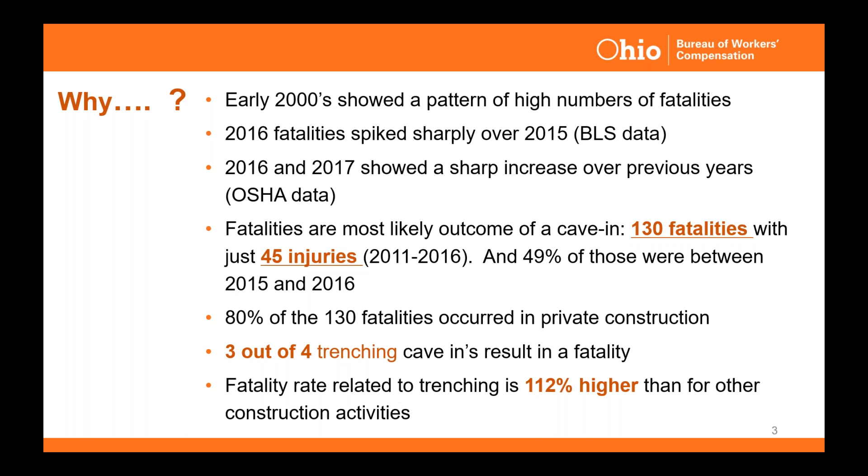There's some annual background information on excavation and trenching cave-in data. You can see that spike I referenced in '16, '17, '18. In 2015, this is from the BLS - from January 1st to December 31st of every one of those years. Certainly cause for alarm. Obviously one fatality is too many, but to be seeing about 25 a year, that gets our hackles up in the safety profession.

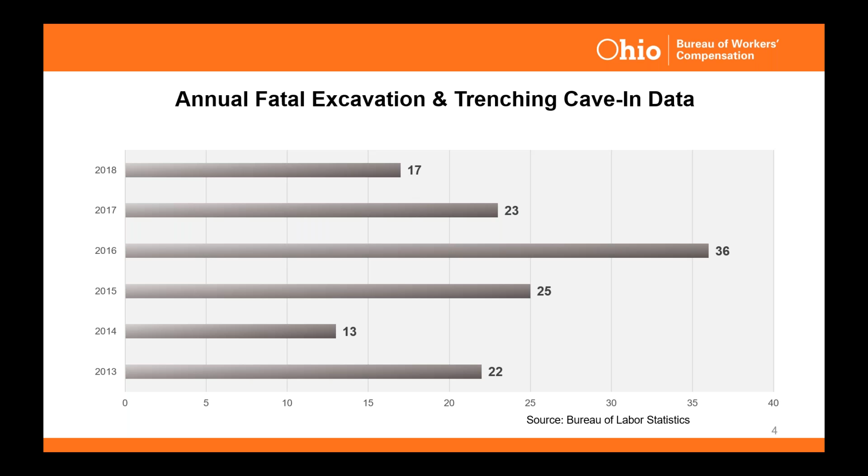OSHA has a little bit different fiscal year, so these numbers don't match up exactly, but you can see they're 20, 25, somewhere around that number every year, which is great cause for concern on our end.

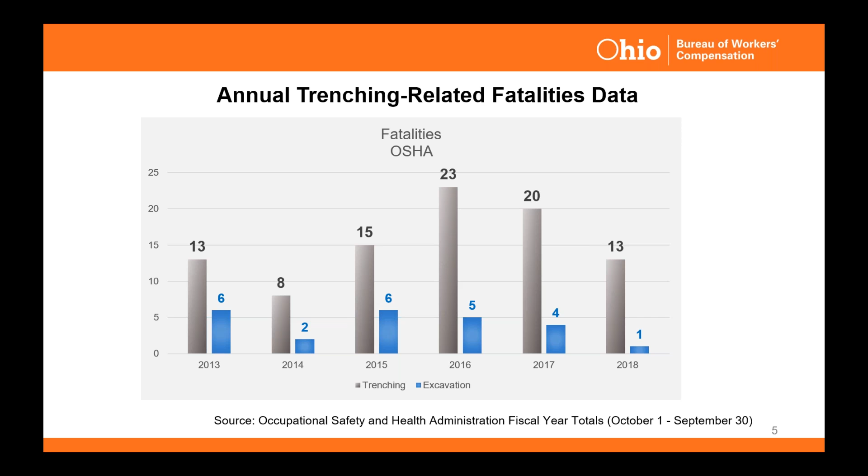There was also a spike in the early 2000s, and that was a really alarming case because one year we had - I believe it was 2002 - 45 trenching fatalities. So a very big problem. OSHA launched a study related to trenching fatalities, and that study was released in 2003. Interestingly, all the statistics from that study are still quite relevant today, so we still use them.

There haven't been a lot of studies done since specifically on this topic, in terms of the demographics gathered during this study. But what OSHA found was that the #1 cause of fatalities was unprotected trenches - totally preventable again. The soil type had not been identified 65% of the time, which is a prerequisite to trench entry. The competent person was not on site 86% of the time - they are there to monitor changing conditions, so it sounds like things may have changed in some of those.

Producing was more important than safety 88% of the time. So it was deemed that the people jumping down in the trenches were - we won't say not as important - but I believe there's a lot of denial that goes on, so producing was prioritized in those cases.

65% of the employers involved in the study had provided no trench safety training. We're finding that to be quite prevalent today - we're trying to rectify that. 42% of the employers had less than 10 employees, so we're talking about small companies. And 5 or fewer workers were on the site when the fatality occurred, so again we're talking about small construction companies, small sites.

When we're out in the field, we don't see the very large companies do this - you know, the Danis people, Great Lakes Construction - the big companies are not really as guilty at cutting corners as the small ones. And the majority occurs in residential construction, you know, using housing developments.

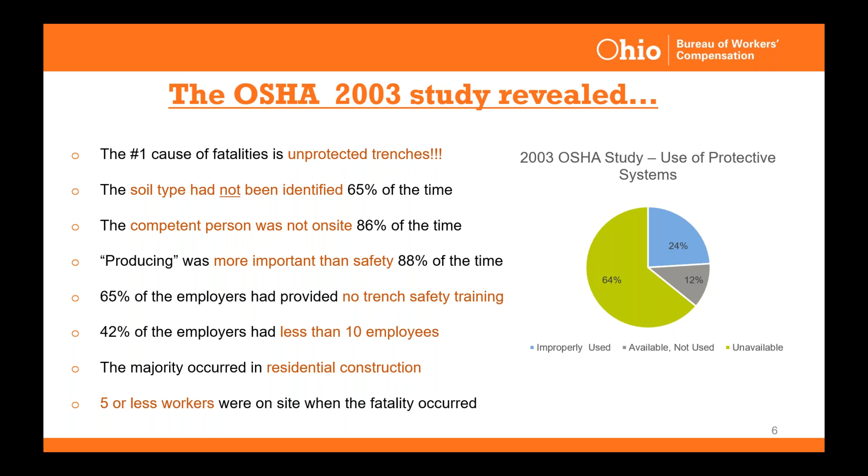When OSHA found all of these things occurring, and some alarming deficiencies in trench safety practices by employers, they launched a National Emphasis Program. It was formulated back in '17, went into place October 2018, and it's still going—OSHA will continue to emphasize trench inspections and trench safety. That order will remain in place until it's canceled or replaced by another order. OSHA also has a really good resource page if you're looking for ways to implement safe trenching practices—we're going to get into some ways today in the webinar—but they have a really good page on it, and that's linked up there.

You can just Google OSHA trenching safety. It's going to give you the same thing.

So let's look at what OSHA is doing from a compliance perspective. In 2019, just looking at some of the citations involved with trenching citations related to not just fatalities, but cave-ins as well.

One in January last year, 212,000. One in November, 210,000. March, 208,000. February, 143,000. You can see it's very easy, once violations are stacked, to get up to a five to six figure situation. I do want to point out these fines were not tallied as a result of the fatality investigation in many cases—I also pulled stuff simply from the National Emphasis Program where compliance officers were in the field and just stopped by a site. So they are heavily enforcing trenching safety, not just as an investigation following a fatality, but doing drop-bys as part of that National Emphasis Program.

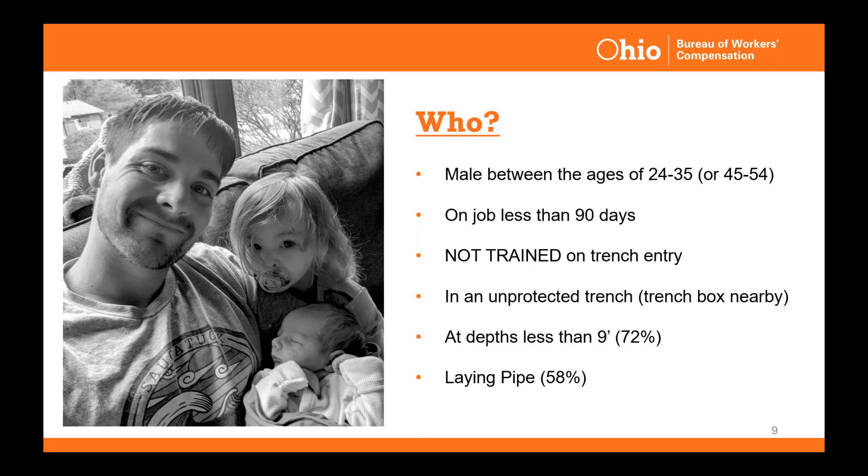So ask yourself, if you lay pipe, is this you? Are you between 24 and 35? Are you new on the job? Do you get in there in an unprotected trench, and are you normally laying pipe? Because 58% of the time, that's what was going on when a fatality or a cave-in occurred.

Some pretty ugly outcomes of injuries can occur as a result of a trench cave-in, outside of a fatality. Suffocation is sort of self-explanatory—it's related to grain engulfment, where every time you exhale, your lungs retreat a little, and then the soil moves in and doesn't let you expand your breathing again, so you suffocate slowly.

Rhabdomyolysis is an intracellular imbalance where the electrolytes in the myoglobin build up and your blood gets toxic, that's a layman's term. Then the kidneys can't process the blood, it's so toxic. They also often suffer concussive forces from the dirt and earth falling in. So we know of people who survive the trench cave-in only to lose their kidneys later and end up on dialysis for a lifelong situation unless they can get a donor.

Amputations—the muscles get starved of blood because the capillaries and veins being crushed, and then a lot of times there's amputations down the road because of gangrene. Traditionally you've seen it, if you ever see an old Western movie somebody always has gangrene set in. So it still occurs today, just because the muscle gets starved of all the blood supply and oxygen.

A lot of back, neck, and leg injuries. There's compression, torquing, twisting, crushing forces involved. Ligaments get torn, tendons and muscles get torn. It's like being hit with a car. So you are going to see a lot of serious injuries, even if you're lucky enough to survive the trench cave-in.

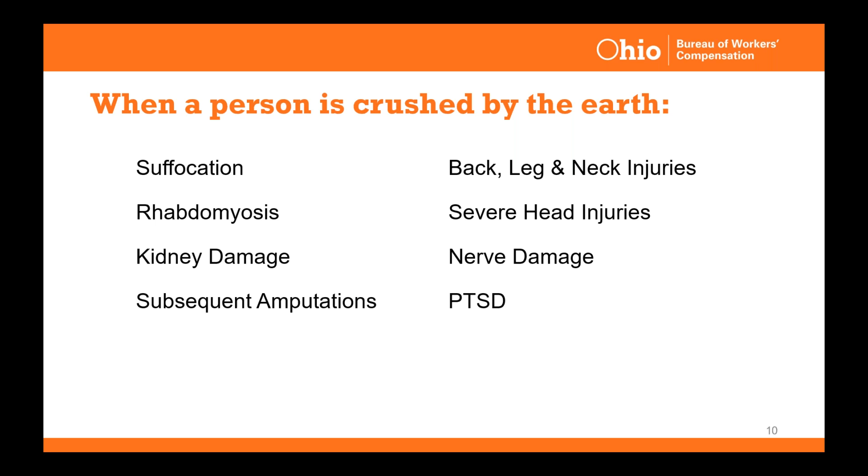So what else can happen? There's other people, as you well know if you've been in the field any time, who have the ability to say how you do your job when you're out in the field—regulatory agencies and those sorts of things.

So in 2020, the OSHA fines for this year, which are adjusted annually for inflation, were $13,494 for the lower end fine. And for a willful violation and a failure to correct, it can go up to $134,937.

Criminal penalties—those are going to be on the increase. They're now charging felonies, including manslaughter. In 2015 there was a change between fatality cases being tried in local small courts, where the magistrates and judges may not have known about OSHA laws, and the citations and fines involved were so small that it was not often moved to a higher court. But in 2015, under the Obama administration, there was a change made where OSHA, the Occupational Safety and Health Administration, is now partnering with the Federal Department of Justice, the DOJ, and they're being tried that way as felonies.

So we're seeing a huge increase. I believe between 1988 and 2001 there were about 150 referred over, and I believe 90 were prosecuted, but only 8 of those between '88 and 2001—that was the only study I could find—resulted in indictments. But already since 2015, since it went to the DOJ and it has more teeth, we've seen, I believe, 6 in the United States where indictment occurs. So usually we're seeing manslaughter charges and jail sentences, usually up to 6 months as a jail sentence, and the fines by the courts can go up into the 6 figures once again.

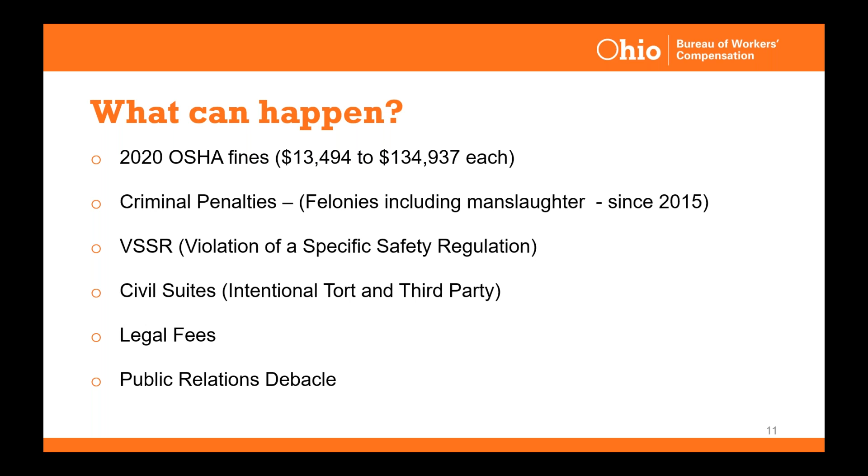So what else can happen? At a multi-employer work site, OSHA can cite anyone on site who's exposed to the hazard. So if you have a general contractor, maybe an electrician and a plumber, maybe some roofers coming out to check out the work site, everyone who's near that trench can be cited, not just the person working on the trench, not just that contractor. The chain reaction is that—and we've seen it rarely, but it does happen—much like a confined space, where one person goes into a trench, maybe partially or fully buried, and the co-workers, being very passionate about their friend, jump in to help, and then there's a second collapse, which is quite likely after the first collapse of a wall, and then you have more than one person affected.

Rescue squads can also fall victim to this, so they have to take a lot of time to set up for a trench rescue. Normally by the time they get there, 10 minutes have passed, and at 10 minutes anyone who is completely engulfed by the cave-in will have expired by that time. There will be escalated workers' comp premiums as well.

Hey Mona, you've been talking now about 20 minutes. I think we should break it up a bit and let's get some interaction going on here. Why don't... that's funny you said that.

Thank you, Ray, because I have on my next slide a note, and I wanted to say what an excavation is: a man-made cut, cavity, trench, or depression. So keep that in mind, everyone. But then what's a trench?

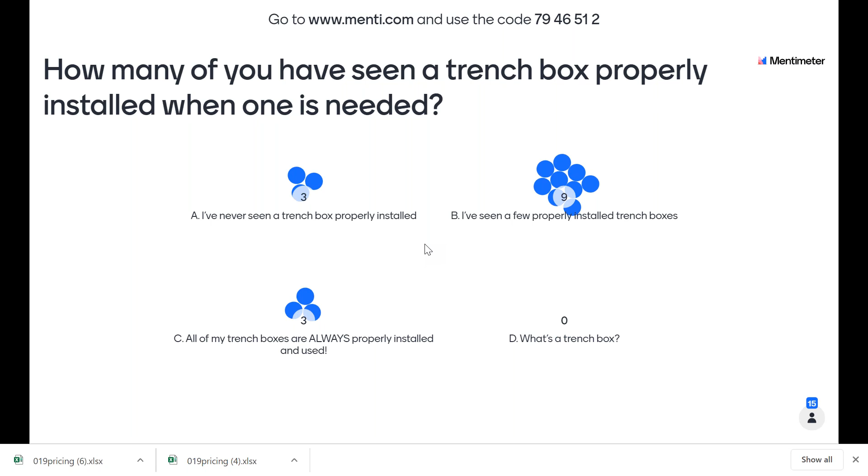All right, come on people, I want everybody to participate. We only got like 15 dots. We have a shy crowd today. Don't be shy, people. Or their carbs ran out from lunch and they are slumped in their chair. Come on, we're not even halfway there yet, let's get a few more people in here.

How many people do we have logged on, Ray? I thought it was somewhere around 45. Am I right? I haven't looked at it lately. Right now we've got 61. Oh okay, all right, only 23 people have answered.

All right, you probably can't see the screen, can you Mona? I can on my second screen. I'm actually seeing a lot of blue dots, and we need more blue dots.

Okay, all right, 28 people have answered. The majority is B, I've seen a few properly installed trench boxes. 3 people have never seen a trench box properly installed, 1 says what's a trench box, and 3 say all of my trench boxes are always properly installed and used. So the majority is B, a few have seen a few properly installed trench boxes. And which is in keeping with statistics. Yep, unfortunately.

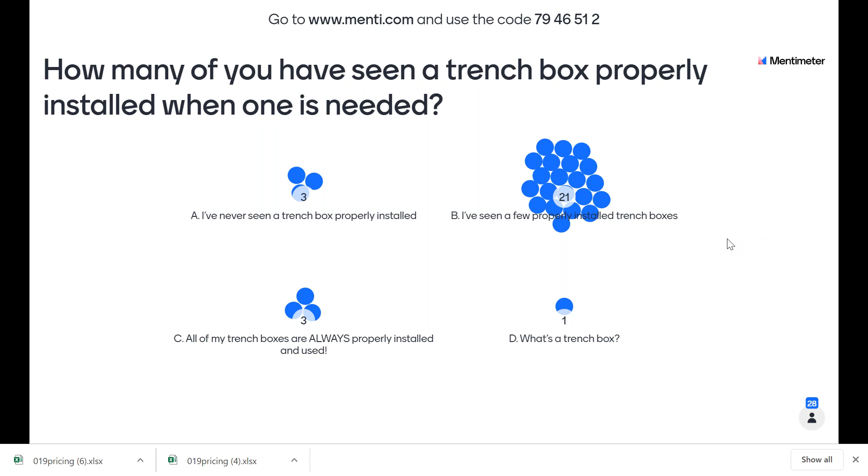See, we have a comment, let me see what this is. Okay, we have a comment there to answer your first question, Mona. Yeah, when we get back to the PowerPoints, okay. I've copied several comments into the chat box for review.

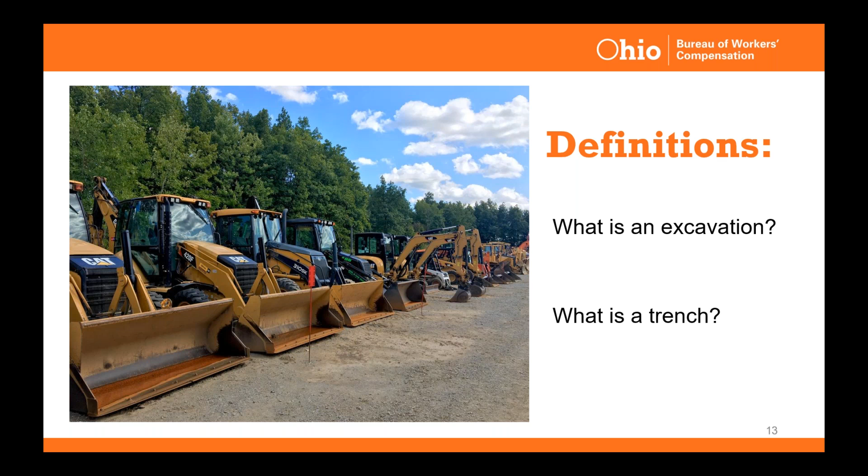And for some reason, when you're switching, give us a second, bear with us, because when I'm getting switched back as a speaker, there's a delay in my slide transition. So I have hit the button for the next slide. I'm going to start talking anyway while it waits for itself to change. There it goes, there you go.

So yeah, there's a ton of related rules and regulations. Those are on our trench safety page for the state of Ohio. We're going to give you that website here in a bit. I believe it's trenchsafetyohio.gov, but the point being that there are a ton. And on our website, you can go and click on them.

I've actually got this list copied on the Ohio Bureau of Workers' Comp, trenchsafetyohio.gov website. And you can see that we don't stop short at just OSHA rules and regulations. Ohio Revised Code also has some. And then there's that -- we'll talk later about traffic -- and then ANSI has some, and we're going to talk a little bit about ANSI today. I think it's pretty important.

The common ones we just look to is going to be subpart P, 650, 651, and 652, ANSI, and then the Ohio Administrative Code.

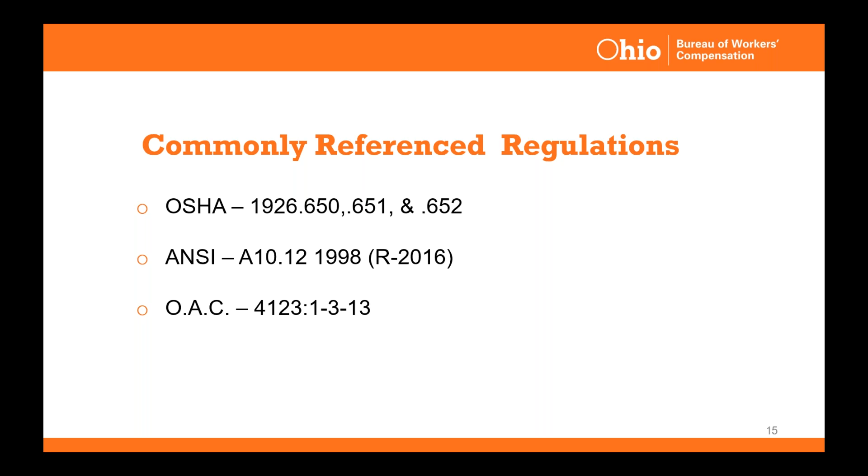So not a lot more is expected of you as contractors. It hasn't changed that much. It's just very important that you look at what is required and follow through with that. We did talk about a competent person earlier. So for the rest of today, just to give you a little outline: we're going to talk about the competent person discussion, excavation hazards, protection from cave-ins, and additional excavation hazards to look for. We also want to talk about safety culture, because the biggest reason requirements aren't followed in the field is the overall culture and attitude on the work site, so we'll give you some ideas on how to do things better in terms of practices and on-site implementation.

So what's a competent person do? Well, this is OSHA's definition. I told you we would discuss ANSI, the American National Standards Institute, but OSHA's definition of a competent person is that they have to be capable of identifying hazards and having the authority to eliminate them. That's key. The competent person role itself is a very technical job.

Anyone on the site is going to look very heavily to that person. They have to be technically proficient. It's going to be someone you can ask questions to. Finding someone who can do the technical part is perhaps not quite so pressing, there's a lot of people on the job that can normally do that. But the question is, that's the easy part, to be honest, picking someone you can train to do the technical part of the job.

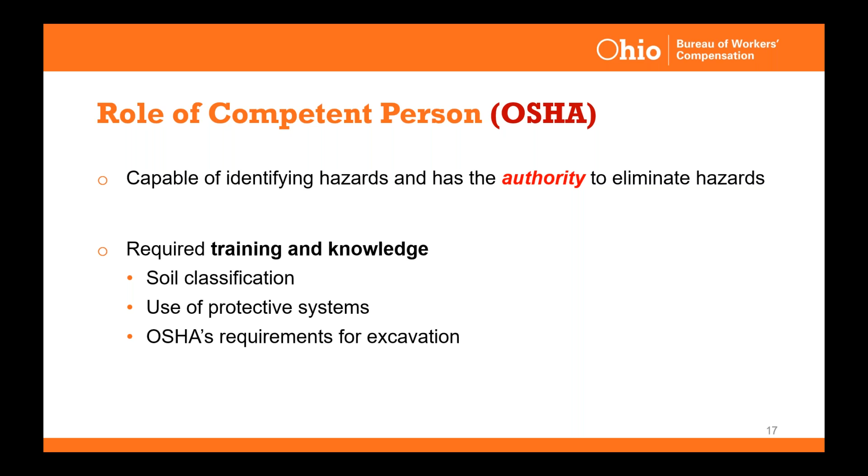ANSI, the American National Standards Institute — this is a little above and beyond what OSHA says, because remember OSHA said they need to be capable of identifying hazards, having the authority to eliminate them, and knowing the basic OSHA standards. ANSI says the competent person for excavation should be one who's received training, can demonstrate the knowledge, skills, and abilities required by the standard, capable of identifying all existing and predictable hazards in the surrounding and working conditions that are unsanitary, hazardous, or dangerous to employees. And that has to be a person who has the authorization and responsibility to take prompt corrective measures to eliminate and control the hazards and conditions.

So it is a lot more in-depth. Ray and I give each other points for how many word plays we can make on this — in-depth and digging in deeper. But the standards are there, they can always be referenced. There's YouTube videos available to train and refresh people, so that's always an option for you.

But remember, as far as OSHA is concerned, you might ask, what's the relationship between OSHA and ANSI? Well, OSHA can incorporate ANSI standards in two ways. They can reference the ANSI standard within their OSHA regulations, referred to as incorporation by reference to another standard, which they're allowed to do. And they can also require adherence to ANSI standards through the general duty clause. Unfortunately, the general duty clause is often seen following a post-investigation situation from a fatality — they don't usually just show up on site and throw out a general duty clause, because they have to be able to reference a standard. But it will often happen as a follow-up, unfortunately, to a fatality.

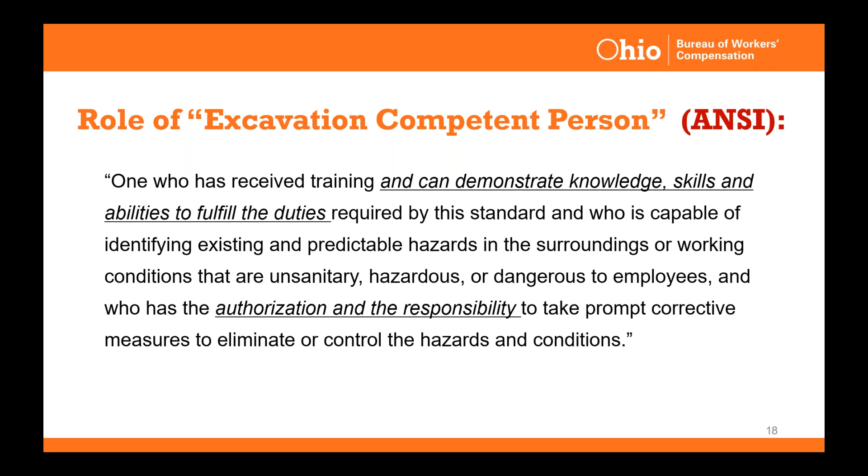Remember that OSHA can incorporate ANSI standards even in the process of a citation. So ANSI does require that a written safety and health plan be developed by the contractor for excavation work that describes the requirements of and the procedures to be implemented. That's for everyone, under their general requirements. Again, OSHA can reference those, litigators can reference those. If you were to have a fatality and it were to go into the form of a civil suit, think about what you're going to be asked in court.

How do you defend it? Can you defend it to the attorneys, the judges, to OSHA? Did you have a written safety and health plan for the entry of that trench? Not every trench, that trench. You should have specific procedures for that one because they're all different. Similar maybe in the same housing development, yet still different. We can talk about in a few minutes why that is.

So general requirements from ANSI, real quick there - things every employer should be doing anyway. Designate an excavation competent person. Instruct each employee in the recognition and avoidance of unsafe conditions and the applicable regulations pertaining to the same thing. Prepare a record that contains the identity of each employee, the date of the training, and the means used to verify the employee understood the training. So that is a verification of knowledge.

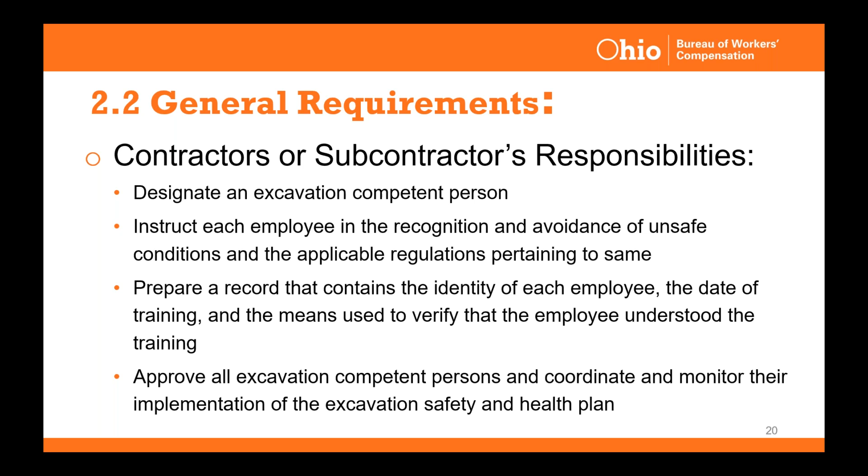The manufacturers of the protective equipment designed these systems for each soil type. So not every trench box is good for every soil type. And then they also design them for the intended depth of the use and whether or not they'll be stacked. Making a mistake in your soil typing can be a very grave error with serious injuries or fatalities that result from that mistake.

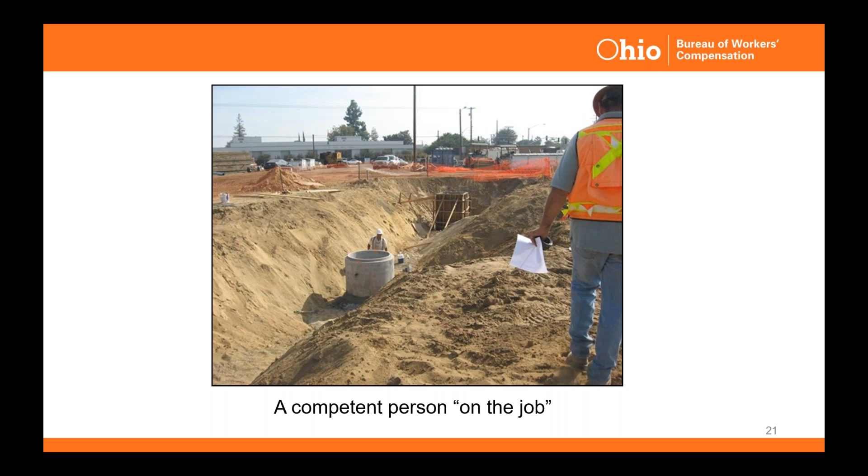Soil classifications. There's a lot in here. It's very technical. Again, it's something your competent person is going to be heavily involved in. But it's easy to remember that there's 3 types. Hint, hint, you might be seeing that question again. There's 3 types, and they're going to fall into 2 categories. There's going to be a cohesive soil and a granular soil.

And again, this is not a course in soil typing. You can go to courses for that, but we just want you to remember that you want to be a little bit familiar with each type. You want to know what you're working on. You want to know if it's being managed correctly. Things to think about.

So there's cohesive and there's granular, and it's sort of the way it sounds. Cohesive contains fine particles that are enough so that they have enough clay so that they'll stick to themselves. Think about them being almost glue-like, but not quite. And think about the more cohesive the soil and the more clay it has in it, the less likely that you're going to have a cave-in.

Granular soils are made up of coarse particles such as sand or gravel. This type of soil will not stick to itself. The less cohesive it is, the greater measures are needed to prevent cave-ins, or some type of protection if you're going to enter that trench.

So type A soil has a compressive strength of 1.5 TSF. Does anybody know what TSF is? Put that in the chat. You can Google that and put that in the chat if you don't know.

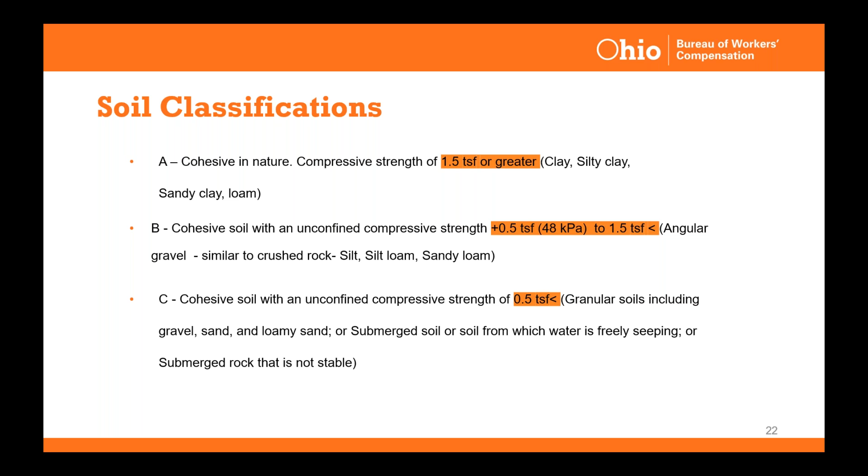There we go. So we wanted to talk a little bit about cave-ins today. Well, let me back up before I move forward. So to make the point of correct soil classification, it's easy to make mistakes. There's a lot of training required. I think it takes practice.

I would do some on-the-job apprenticing type work to try to get that correct and know you're doing it correct. The 2 tests will help you. There's even labs or lab tests you can do, but you want to have it right on site in front of you.

And the one thing, just to mention about correctly classifying the soil, anytime you're not sure, you can always default to C. That means you have to use some form of protection or bracing or shoring.

What's interesting is when I've been in the field, I've had a lot of employers, I think they get a little intimidated. We're consultants, we're not compliance, but we do pull up with state plates on. And I think a lot of people get intimidated by that and get worried. Their default is to say, well, it's type A, we don't need a box.

So if I walk up, I see nothing but a hard hat sticking out the top of the trench, and almost instantly somebody says, well, that's type A. Again, I'm a consultant. I'm not going to cite anybody, but I sort of ask them, well, how do you defend that?

What test did you do? Did you do 2 tests? And if they aren't sure still, I say, don't worry about defending it to me. You guys need to ask yourself the question, if something goes wrong and there's a fatality, if you go to courts, can you defend it in front of a litigation attorney? Can you defend it to OSHA?

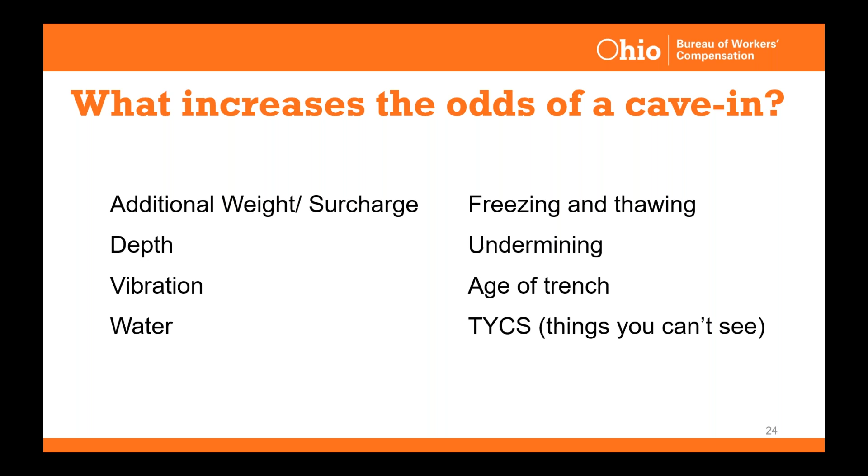So when is protection required? At what depth? Five feet or more, it's black and white - there's going to be some sort of assessment, protection, or shielding often required. The competent person may have to determine the need for it, and they're going to determine the potential for cave-in. They're the one that chooses it.

And why would you inspect trenches for less than five feet of digging depth? The video talked about that a little bit, but there still may be other hazards. Just remember the TYCSs, things you can't see. So you want to inspect those trenches all the time. The changes every day aren't always visible, and you want to make sure you're on top of that before it happens.

Cave-ins are going to happen. They're very silent. We staged one, and I'll see if I can get this to go back. That one right there - I'm going to give you a few seconds to catch up. I know you're getting a delay in the field.

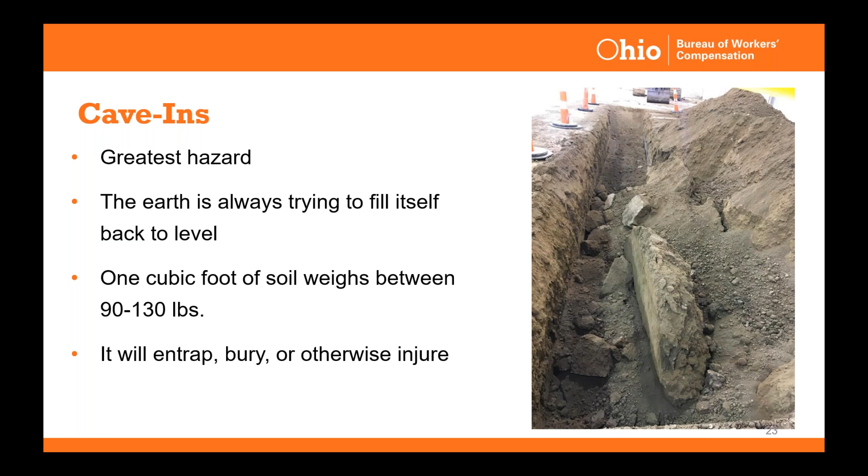We did stage this one as a demo at a trenching safety day we had in Cygnet, Ohio, at the Ohio Operating Engineers, and I was floored when that thing went in. There's just no sound - you don't see them coming. It's not like Hollywood where there's all these bells and whistles going off and everybody jumps out and runs to a safe spot and then the thing caves in. That's not how it works, or we wouldn't have so many fatalities.

So you can see a lot of things going on in that particular site, not least of which there's no trench box, but there's tree roots, unstable soil, likely previously disturbed. We don't know that, but you always have to assume it has been if you're not sure. Surcharges, falling gravel, all kinds of things.

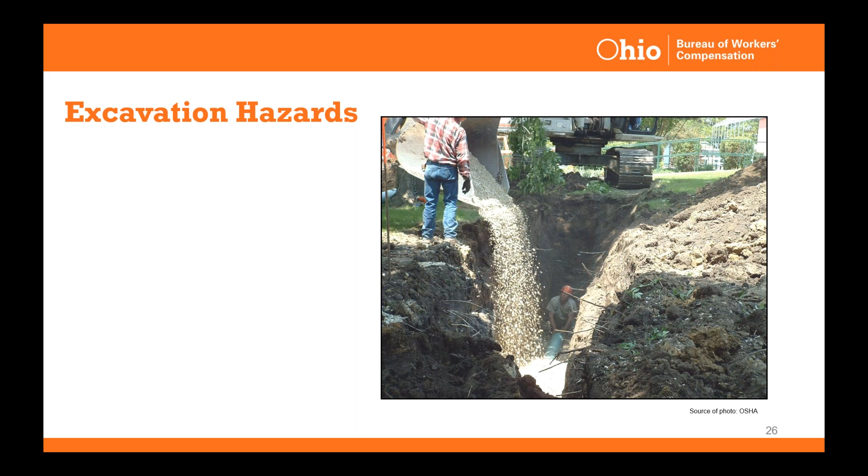You've got some equipment parked right on the edge of the trench too, don't you? Yep, that's an extra surcharge there, and it's probably vibrating as well. That's normally going to be there - that's why you have to double up on your protective systems. That's a great question, Ray. Good job. We are going to do a hazard assessment here in a minute.

We'd asked you a question earlier about what were the ways to ensure protection for any worker entering a trench. You guys got it right by and large - shoring, sloping, and shielding. Those are the three ways. Shoring in particular supports the earthen walls with outward pressure. I hate to say the word bracing because it's used in other technical terms and OSHA requirements, but it sort of braces outwards, it pushes outwards. That's what a shoring will do.

Sloping is when you lay back the soil to remove pressure, and it can be somewhat self-supporting that way. The weakness of sloping is that oftentimes we can't do that when we're out on a site, especially if we're doing utilities, running them next to roadways. There's not usually a lot of room to slope. The ideal is that you're going to do it at least 34 degrees, and that's a big, huge swath of land. There's often not enough room to do that. People will take a stab at it, but it's not usually quite the 34 degrees, so it doesn't count. It's not like horseshoes, it doesn't count if it's not right.

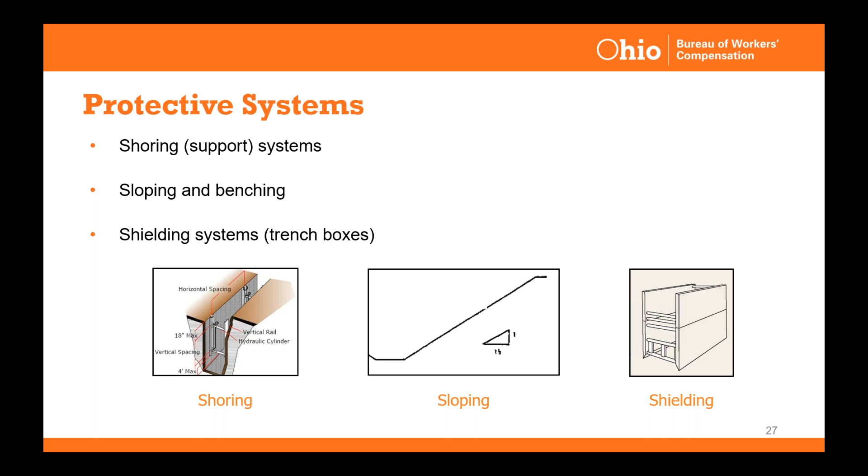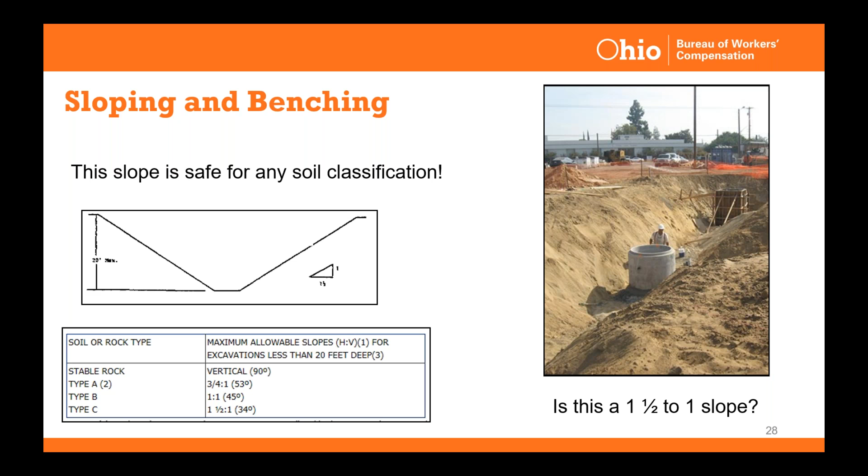Shield system, here's a little hazard find here that's kind of fun. As far as shield systems, there's a lot of them out there. There's pretty much going to be one for every application. They're often adjustable, they come in a variety of sizes and boxes. Some are stackable, some are not. But let's look at the hazards there for a second.

I'm going to prompt you to do a chat. Tell us what you see in terms of hazards for that particular photo, which came from OSHA, by the way, with permission. So some things are being done well there, but even with what we've covered today, see if you can pick out what's not being done well and throw it in the chat box.

Okay, we're waiting for comments. Did we lose you guys? Can you hear me, Mona? Yeah, I can hear you. Okay. Yeah. Did we lose you in the audience?

Okay, someone typed improper fit. Yep, good. Digging in trench box, trench is too wide. Gap between box and ground on the left. Yep, they're getting good stuff here. Okay, good job, you guys.

Thank you for hanging in there. Yeah, it's not backfilled, as you guys inferred. It's not snugged up. Either they needed a wider box or to backfill it. They do some things that are going well - they appear to be using the ladder like they required. And you can't see it, but there's several chunks where it's already caved in a bit. You could see, like on the right there, I could see a little bit better in a large photo.

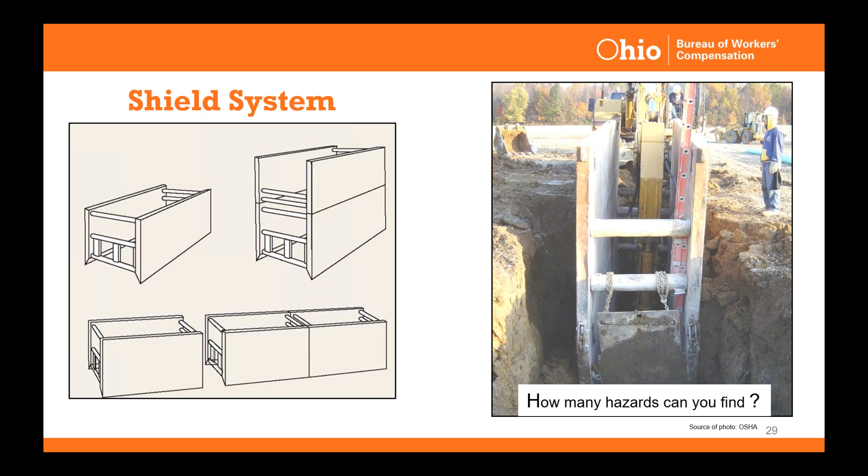There it goes. Okay, so let's talk a little bit about fall protection. We promised you today when we talked about the 4 points we were going to discuss, that we were going to cover not just sloping, shoring, shielding, and competent person, but also additional hazards as the webinar moves on. There's things that would be on any site, even for people who are not trench entry workers, and that's fall protection.

So for fall protection, what's correct and what's not. We tend to see number one a little bit on the left out on the job. Falls are going to be a hazard. The footing itself is bad - it's uneven, it's slippery. If you put a hole in the ground, there's a recipe for serious injury, especially up here in the Northwest where we get a lot of ice, and Northeast too, a lot of ice and slippery drizzle. So you're sort of looking at a workers' comp claim around these holes, and you want to make them as safe as you possibly can in terms of footing.

In the first photo, they're crossing back and forth over that trench with a board. They've taken the time at least to put a board over it instead of jumping over it, which we tend to see. But remember, since that 1989 amendment came to the standard, any trench over 30 inches wide and 6 feet deep has to include a guardrail system for fall protection. It can look similar to the one on the right.

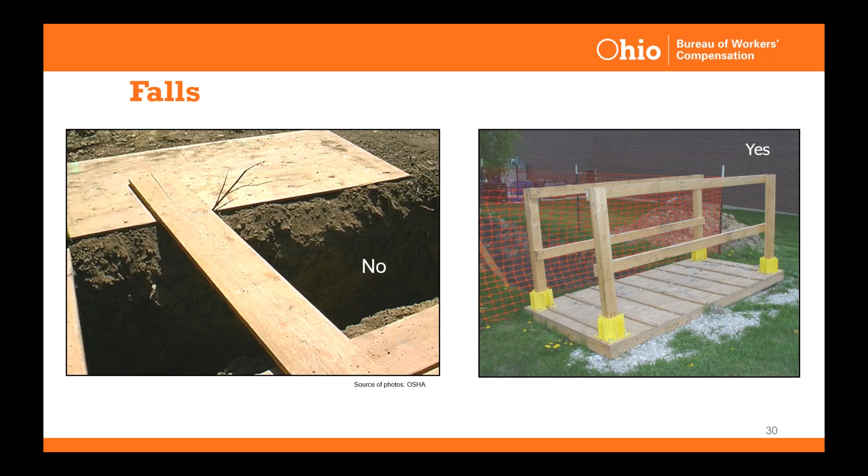Another hazard - we promised to talk about hazards - is adjacent structures. Earlier I referenced we'd get to this, and this is where we are. Anytime there's an adjacent structure, the soil can become very unstable if the earth next to it is removed, and you don't want to undercut them. You have to support them somehow. It's highly technical - you want an engineer involved, and a competent person has to ensure all the precautions are implemented.

Just don't ever forget there's that adjacent structure. You're going to have that as extra weight. You're going to have your backhoe as extra weight, your vehicles, and the materials. All that stuff adds a surcharge to that soil and makes it want to re-level itself faster than it would on its own if you just dug a trench freestanding by itself.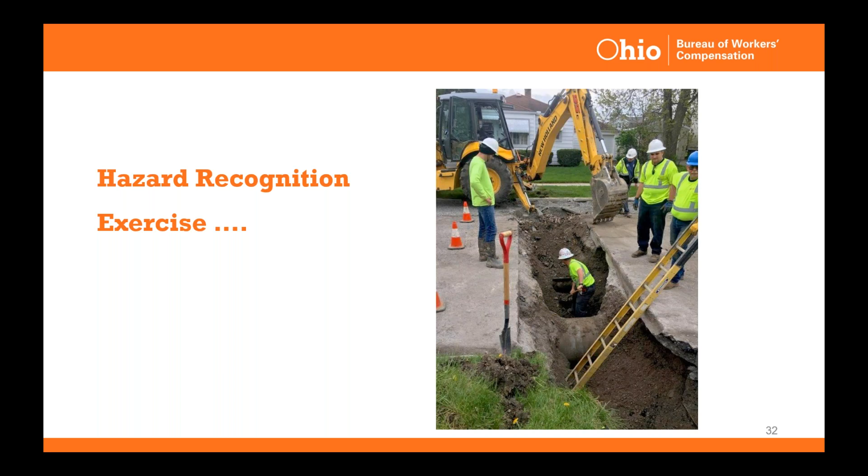Okay, there we go. So underground utilities, everybody knows that before you dig, you call Ohio 811. I think everybody does a pretty good job with that from what I've been working with the Ohio 811 people for a little bit. And there is a requirement. We have it linked, and they have it linked as well on their page, but OSHA requires under 1926-651 section B3 that when an excavation operation approaches an estimated location of underground installations, the exact location of the installation shall be determined by safe and acceptable means.

And then there's also an Ohio code referencing that. So it's mandatory across the board, and they will always come out usually within 2 or 3 days, if not sooner. And then you've got those markings on the ground, and it's amazing. I'm sure many of you have had this done—it's kind of interesting to realize that there's a lot more down there than you think, and there could be dead lines you don't know about. I've had it done here, and there were dead electrical lines I didn't even know were under the ground.

We weren't using them. They have a really cool app. Probably many of you have the app loaded, but Ohio 811—you can go to their site or go to the App Store and pull the Ohio 811 app. It might be under Ohio Utility Protection Services, OUPS, but I believe it's on their page. So you can link up to that, get their app. It's actually a bit of fun because there's a section on it where, especially if you're on a big construction site, you can go there and see what tickets have been pulled in reference to Ohio 811.

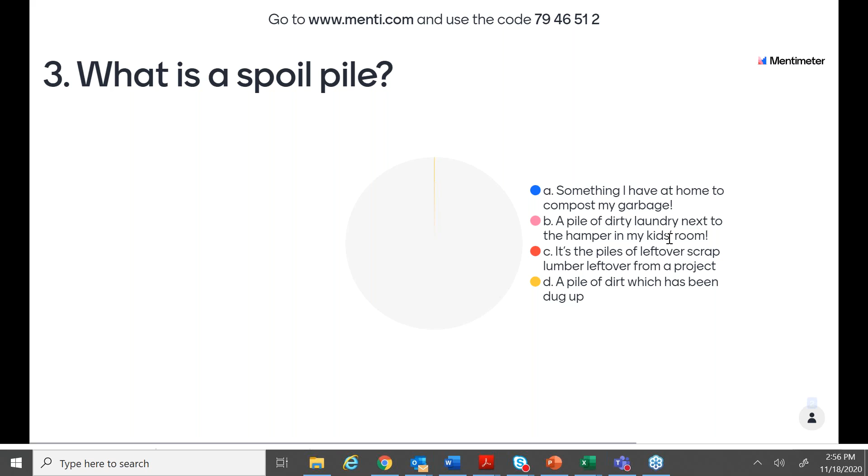Is it the answer on the right? A: something I have at home to compost my garbage. B: a pile of dirty laundry next to the hamper in my kids' room. That's a spoil pile. C: the piles of leftover scrap lumber left over from a project on your house. D: a pile of dirt which has been dug up.

Well, it looks like we're getting a lot of D's. I think they got it. They're paying attention, they're doing good. You guys, I really appreciate you being interactive. It helps us statistically when you're interactive, so we really appreciate you taking the time to do that.

So yeah, it's a pile of dirt which has been dug up. It's not your compost pile, for all you people doing that sort of thing. I have horses, so I have a different kind of pile out back, and those are different.

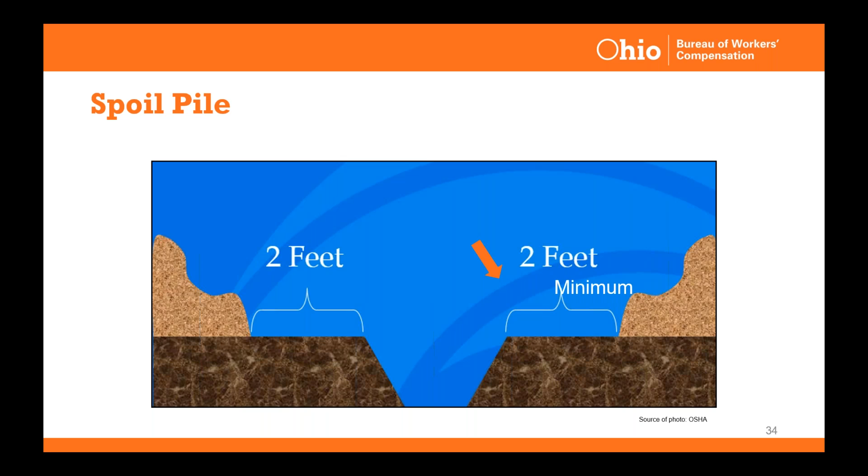So we talked a little bit about traffic hazards before. We just wanted to mention there are requirements for traffic hazards, how to work around traffic, whether or not to use a flag person. When we're out and about, I almost need to turn it over to Ray at this time. I'll just say that I don't see compliance very often to the T. It's a very complicated set of codes and requirements. Ray, what do you want to say about the MUTCD?

Yeah, we have the Ohio Manual of Uniform Traffic Control Devices, and they can get a direct link to that manual right on our Ohio LTAP webpage under Resources and Programs. There's also an app they can download to their phone to help them set up their work zones properly.

And Mona, if you ever see a bad work zone, feel free to take pictures for me. Oh, lots of times. It's almost like trenching - it's easier to find people out of compliance than in compliance. Again, we're consultants at the Bureau, but I would like to see people doing more out there. I think we're back to the larger companies - unfortunately, when we see the larger companies, they seem to do a better job than the smaller companies at compliance. So it is what it is, we just got to keep working with it. And that's why we're doing things like today, doing webinars to help you get clarity on what's really required.

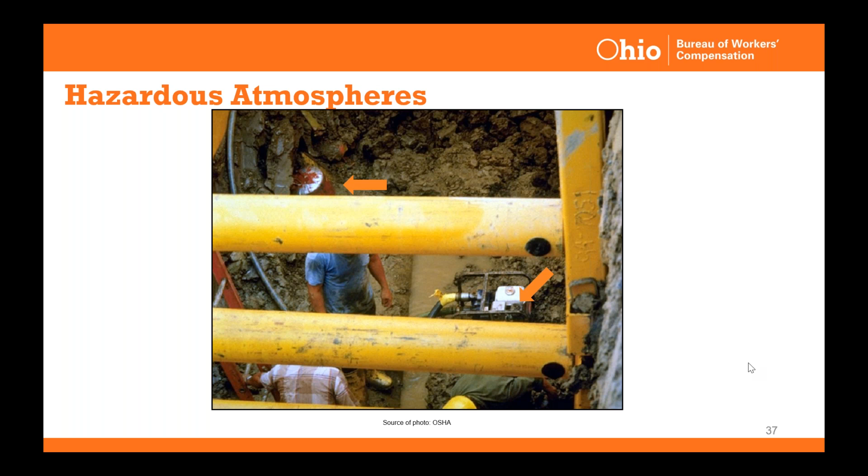Great questions, guys, keep them coming. So, hazardous atmospheres - monitor for those, treat it like a confined space, take additional precautions. The competent person will be the one who is really going to be working on that and developing preventative and precautionary measures, as well as doing any sort of monitoring.

One year when we first moved here, we were laying an additional water line and rented one of those handheld push-behind trenchers, and things were going well. But we dipped into a swale, and that's when I learned, coming from the Kentucky-Indiana area, about Northwest Ohio soil - it was caving in, like whipped cream almost, or pudding. As soon as the trencher dug it, it was caving in, and the pipe was getting knocked around so much by the soil caving in that it was very tense that year, because we got it as deep as we could but it kept caving in - we kept getting the pipe as close as we could to the trencher without shredding it.

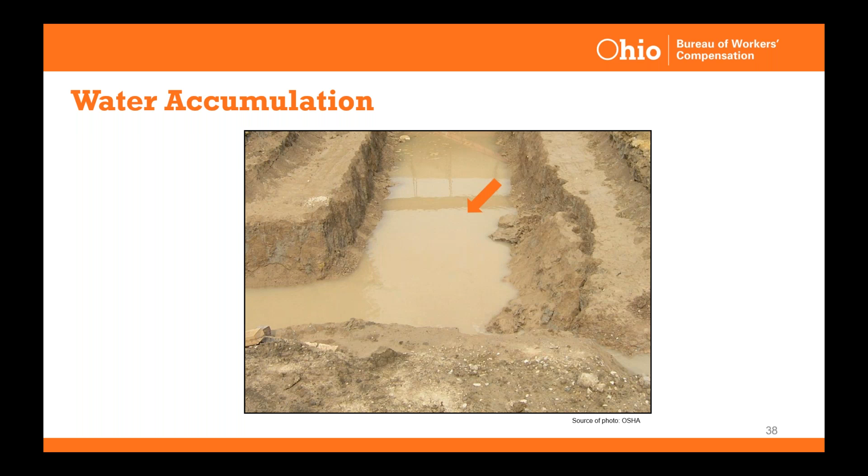Going into winter, we had some tense moments because we weren't sure we got it at 4 feet, and we were worried about our pipes freezing, but they didn't. I believe God was with us, or somebody was, and somehow we got it down and they have not frozen, but it looked like it was going to be that way. Now, if you get to the point where you see water accumulation in a hole, you have to start thinking about getting a registered professional engineer to look at it, to see about water removal, what equipment is needed, and what precautions need to be taken. Again, the competent person is going to have a say-so over all of it.

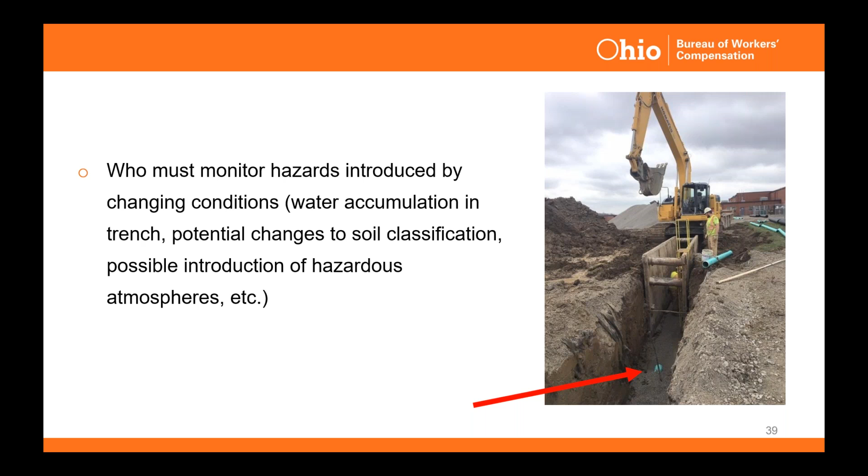So if you're wondering what OSHA citations would be involved that we see the most - keep in mind in Ohio, OSHA does not cover municipalities. Any municipality is not covered by OSHA. In Ohio, you are covered by the Public Employment Risk Reduction Program, PERRP, which provides support and assistance for any city, county, or township. We're lucky to have that requirement, because in a lot of states, public employees aren't covered by any oversight group, so there's not a lot of recourse if something goes wrong - they didn't have standards to follow, so what could they have done wrong?

But in terms of citations we see, OSHA will tell you the number one thing they cite for when they're out in the field is that the trench is 5 feet deep and there are no protective systems in place. There's the standard that requires that, still under subpart P.

Next is a ladder not located every 25 feet in a trench over 4 feet deep. Somebody commented about that ladder in the undercut pavement photo we had - it is required, and it needs to be in close proximity to where they're working. You don't want any obstructions, so if they went to run for the ladder, they couldn't get out. For example, there was a big pipe in that picture, so that's not the ideal placement, but minimally it's required at least every 25 feet. If you want to go above and beyond that, remember you can always exceed what OSHA requires.

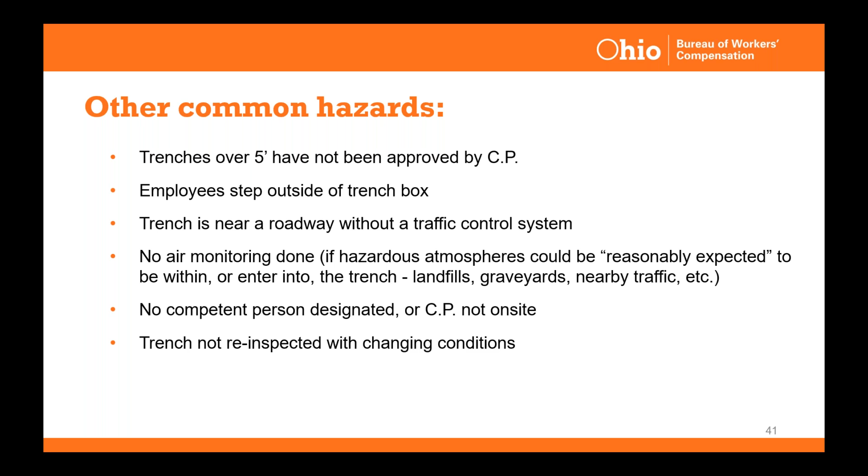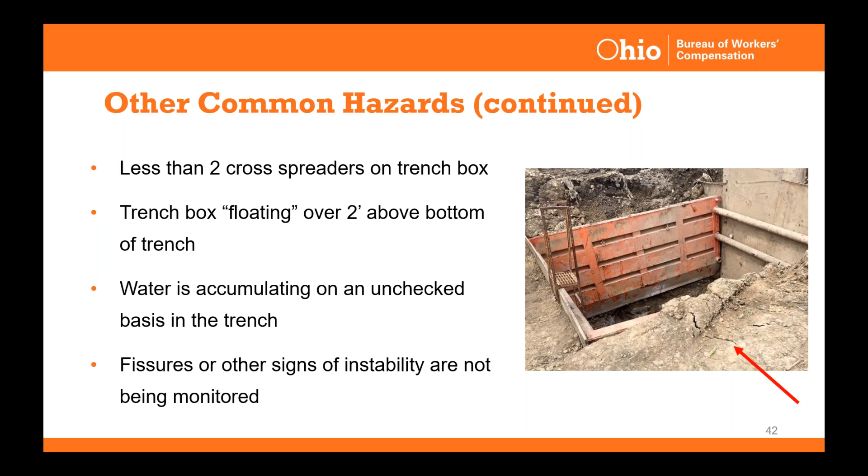Other hazards we see are people working in the trench with live utilities or non-supported utilities. That's a very technical entry, but I have no doubt you guys run into that. If you're anywhere around utilities and they have to stay put and you got to move around them, it's hairy to do, but it's doable. And then they do have to be supported.

Leaping over a trench that's 6 feet in depth and over 30 inches wide, sorry. Employees out of the line of sight of the excavator operator.

Again, that's hard to do for functional capabilities on the job. It's almost always you're going to end up at some point where you can't see the operator of the excavator or the backhoe, but it's something that you got to strive to do. Employees not wearing PPE, fall protection if it's needed, and that sort of thing.

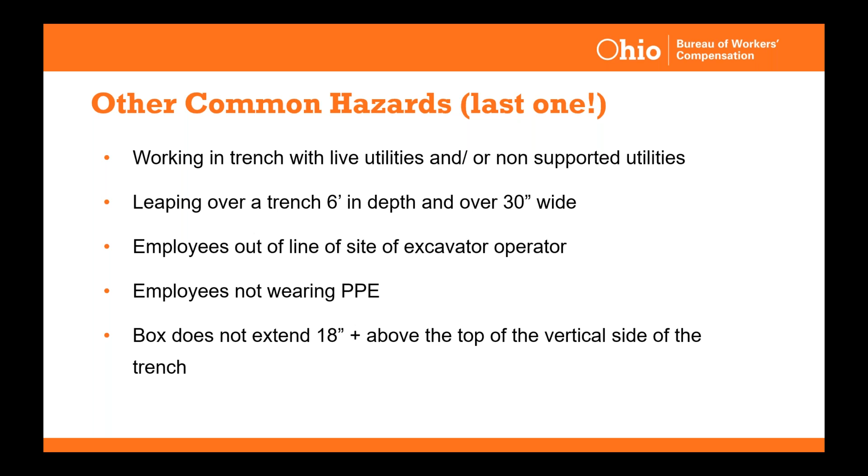And the box does not extend 18 inches above the top vertical side of the trench. That's not always a requirement, but if it's likely that you're going to have some, like on a hill, you do have to have it 18 inches above.

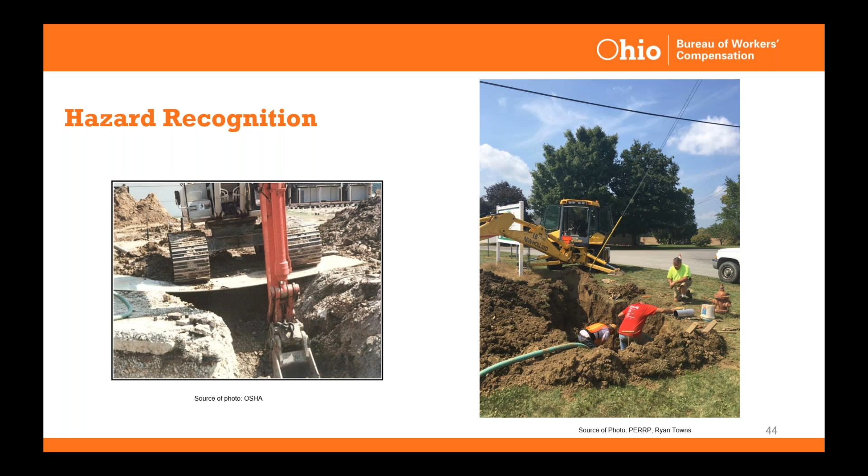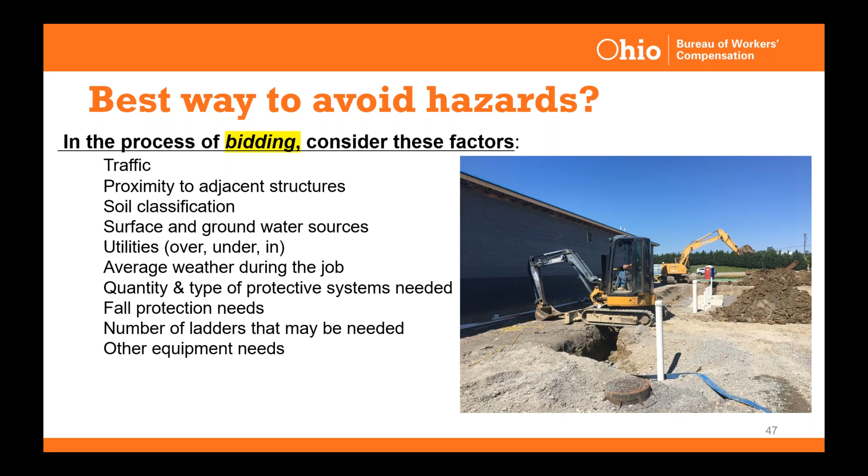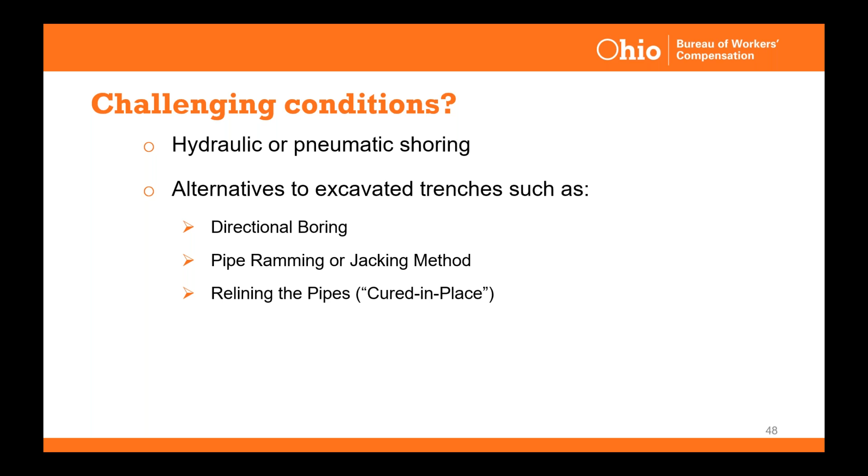Pipe ramming, pipe jacking, relining the pipe, the cured-in-place process, where you can use an old pipe that's dated. Our infrastructure in the country right now is experiencing a lot of dated infrastructure, and you can actually cure a pipe in place. So those are alternatives.

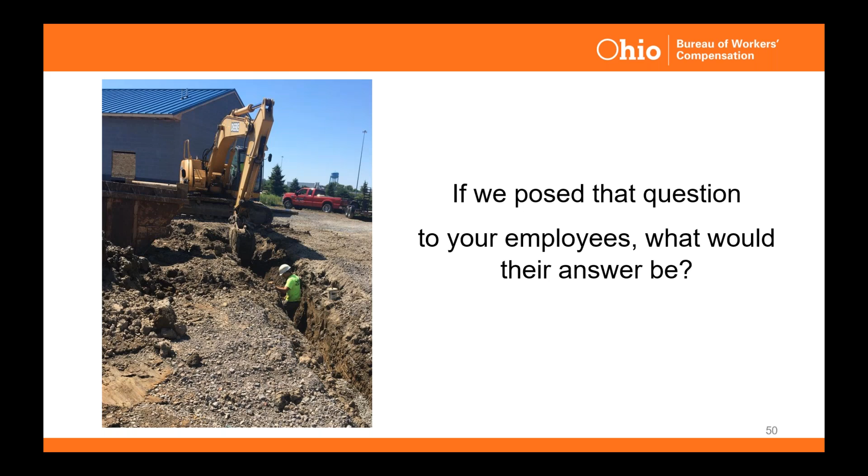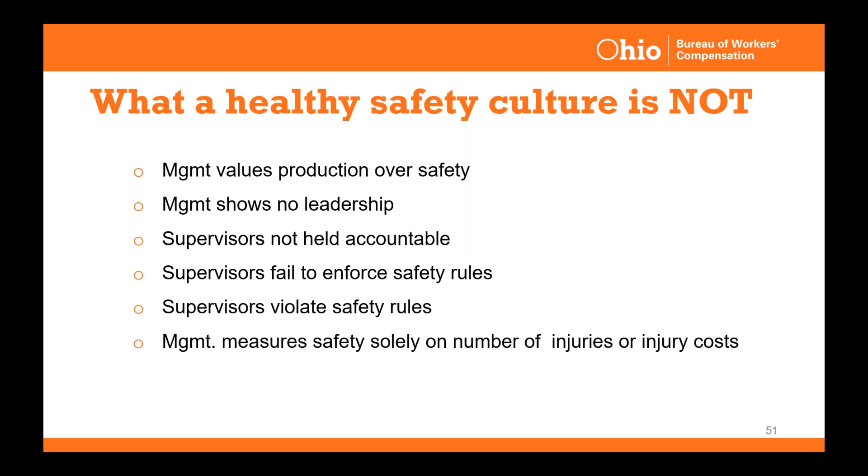We talked about increased workers' comp costs and indirect costs. In the safety profession, we use a 4-to-1 ratio, meaning for every dollar you see for injuries, there's $4 you're not seeing for time spent on investigation, job shutdown, retraining employees, and rehiring employees. There's a lot that goes into that.

A world-class culture means there's actively involved, visible management, that safety is designed in during the planning stages of the bid process, like we talked about, having engineers involved right up front to help with your planning and estimating the cost.

It means having metrics, measurements, and job performance descriptions based on incident prevention strategies—not just 'we went this many days without a lost time,' because that's like watching touchdowns on the football field and saying the other team is beating us, we're down 14, maybe we need to look at a different play. We want you looking at prevention up front, not measuring yourself by what has already happened, because that's downstream—that's done. You can't go back and fix it.

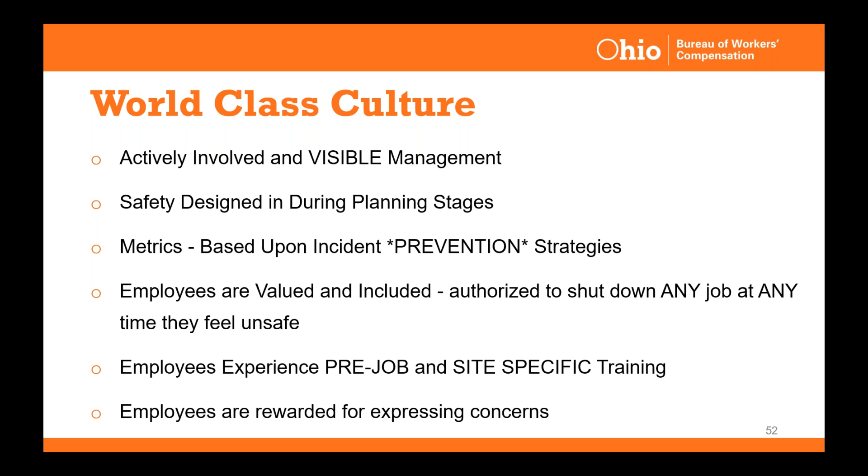World-class culture means employees are valued and included. They are authorized individually to get involved with any shutdown procedures anytime they feel unsafe, and they suffer no repercussions. They are involved in pre-job and site-specific training, even if it's just a 5-minute toolbox talk in the morning, and they're rewarded for expressing their concerns. We like to give people even gift cards, $5 or $10 gift cards, for bringing concerns forward.

So we covered a lot today, a lot of information, some of it technical. Don't feel like we're sending you away with no resources and no help. We have a whole list of them: OSHA, the Ohio BWC, PERRP, Ohio 811, the manuals we mentioned today, NFPA, which has the technical rescue for trenching, NIOSH, and the local EMA.

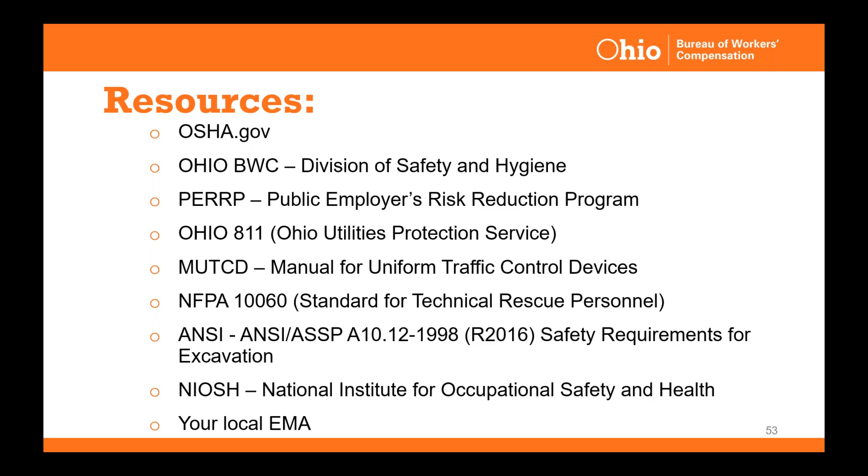That concludes my presentation. I want to thank everybody for their input, their chats, their answers, and for considering this and taking the time to sit through it. So thank you very much.